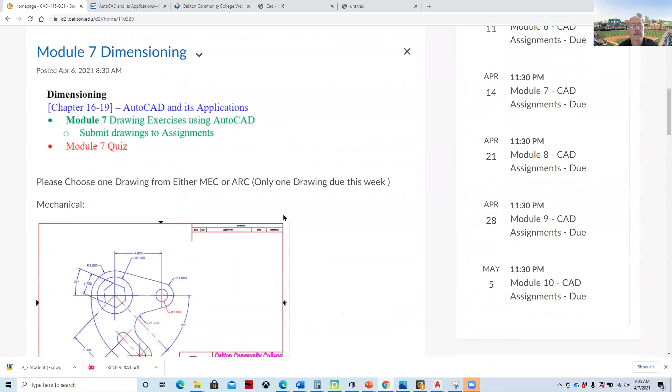We have Module 7 in the main splash page, but we're focusing on Module 6. We've had a few students who've been asking for more work, so we released Module 7 early, but it's not due yet. If you see it on the splash page, you're welcome to go ahead and work on it, and we'll cover that next week.

This week we're going to cover Module 6. Al, do you want to talk about it? Yes, we have the book open, ready to go. It's chapter 12 of our book.

Remember, you have online service for it, so when you click on it, it's going to ask you to log in. Joe is already logged in, so it automatically goes to where it's supposed to be. You can zoom into it a little bit more, or zoom out, depending on what you want to do. You can also print it and see what's going on.

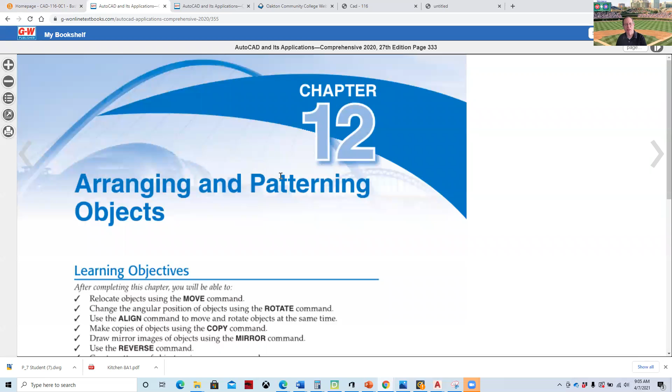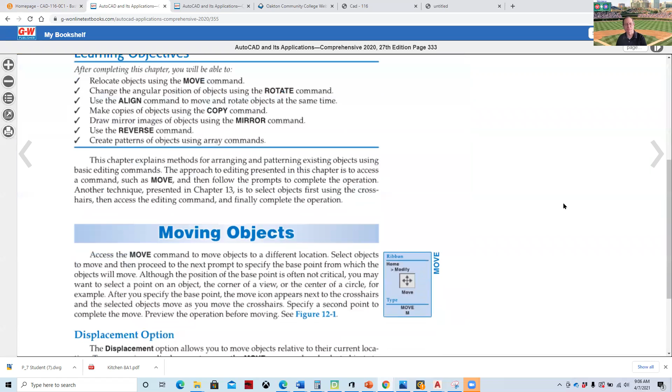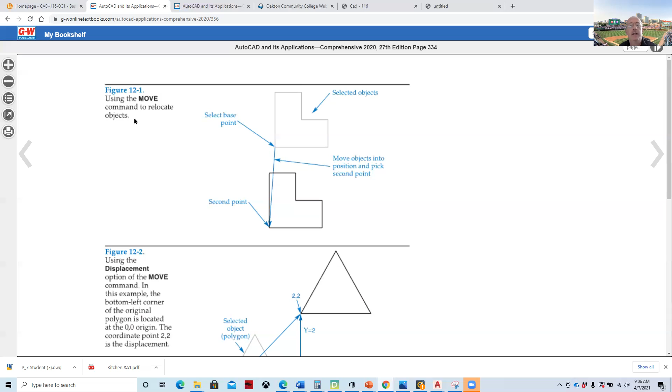As we start to look at where we're at in the textbook, we're at basic modify commands. We started off with draw commands, going through line, circle, arc. Now we're talking about modify commands. When we look at modify commands in AutoCAD, they're very straightforward.

Here's our assignment that we're going to work on. When we work on that assignment, if I wanted to move something like the kitchen sink here or the bathroom sink, what I would do is select Move.

Then you have to read your command prompt. Down here at the bottom it says select objects, or if you have dynamic input on, the words follow the cursor. This is really the way everybody does it now.

It says select object, so it starts off in select mode. We select, then we hit enter to end the selection. Then we say we want to move it from here to here. So it's a 3-step process: you select the objects, then you select the base point, then you select the destination point. Most of your modify commands are like that.

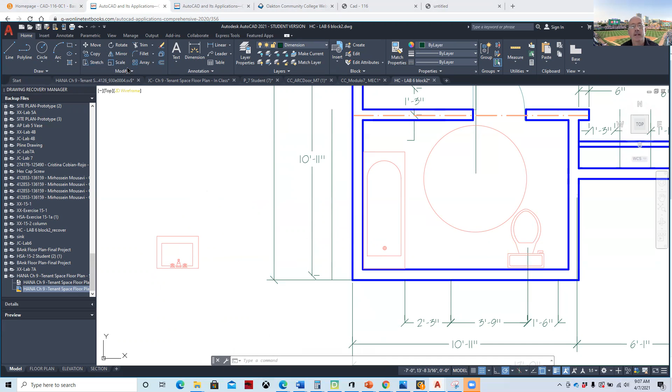So if we look at some of the other stuff here, moving different geometry using object snaps is preferred. CAD is so accurate that you could kind of make it look like you're moving it from the center, but what they're saying is use O-snaps.

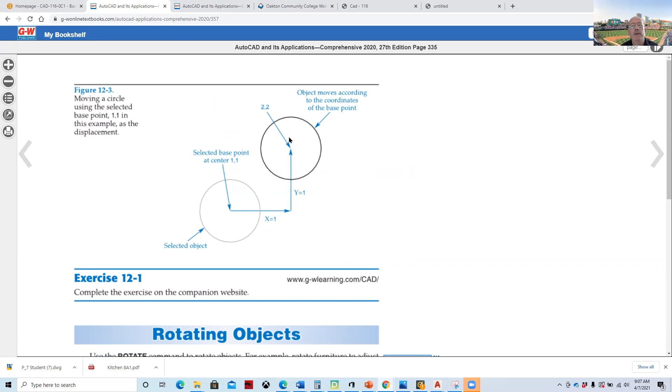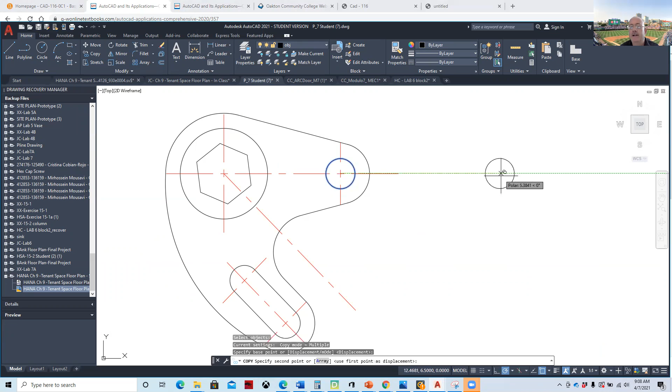When we look at something like this, it has some circular geometry, and I wanted to copy this circle. I'd hit enter, and then it asked me for the base point. If I have my object snaps active and set for center, that's preferred because I can glide over until it acquires the center point. That's a good area to use for displacement of the geometry.

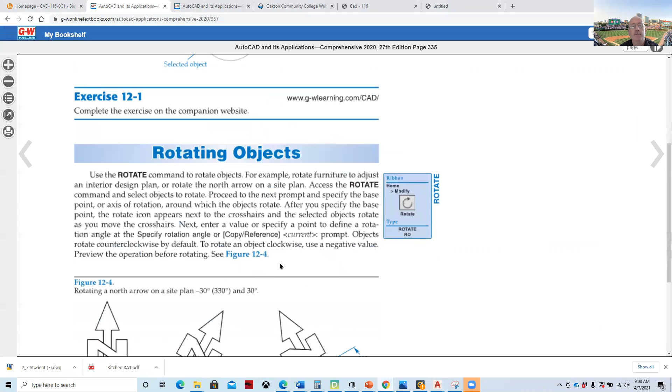More tips and tricks: Rotate, again a modify command where we select the object, give it a base point, and then you can either just move the mouse or type in the rotation angle. Again, a 3-step process.

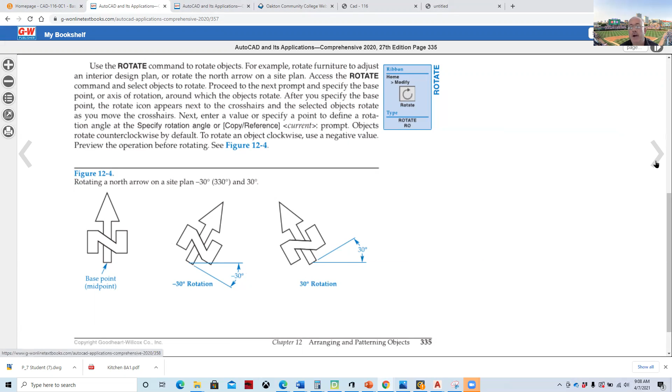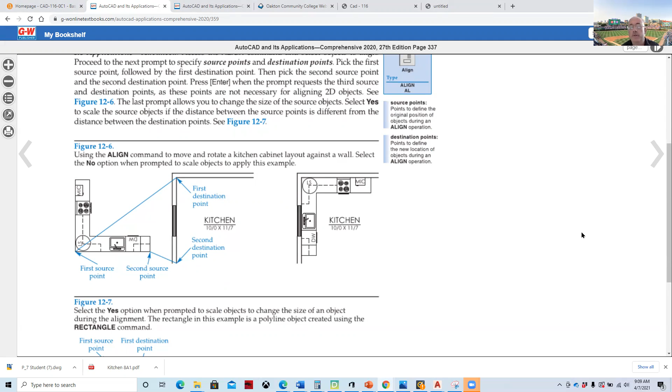More on rotates. You have to remember, AutoCAD started off as a very mechanical, precision kind of software, and it grew into more of a general design software. It does everything, which is what we like about it. You could be working at Trader Joe's making the signs, or for a manufacturing company or an art company. A lot of people use AutoCAD. So we're just going through basics.

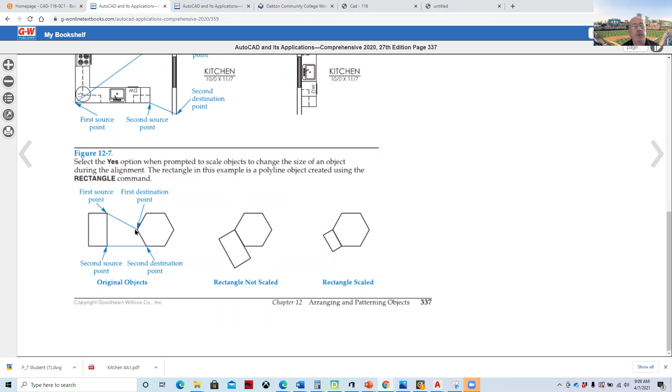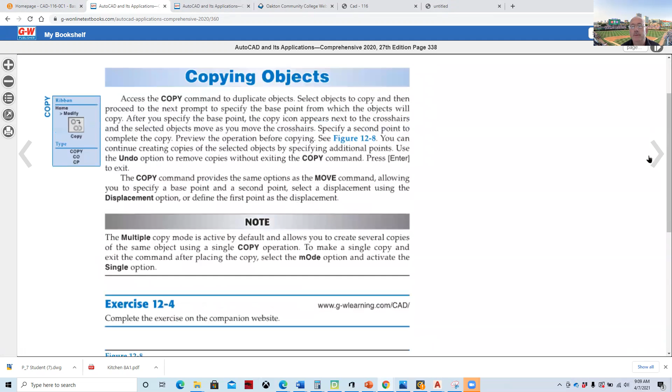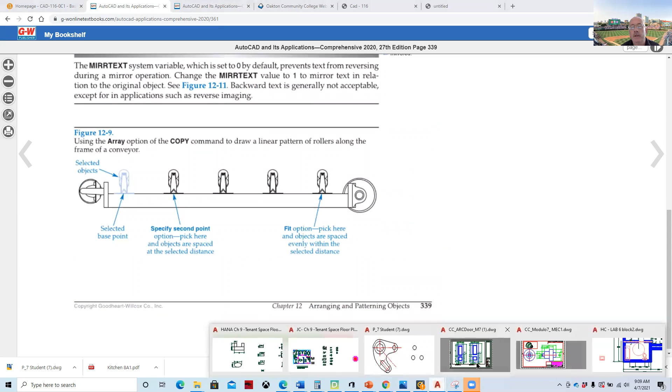As we look at these different commands, source point, destination point, this looks kind of like the Align command. I don't know if they're actually explaining it really well there, but that's what it looks like to me. Copying, we went through and showed that with the sink. Then you get into smarter functions like the Array command or the Mirror command. When we array or mirror different objects, what we're doing is automating things.

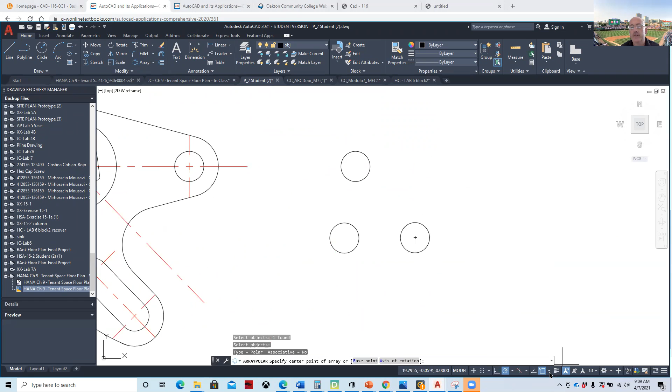So if I want to use a polar array, I can select the object to array, hit enter, and give it the base point. I'm not going to put it on the part because it would just go on top of it. I'm going to come out here and turn on tracking, though I can't quite get it to track out. Let me check if my tracking is on, this is a little nicer. So I can acquire and then go like that.

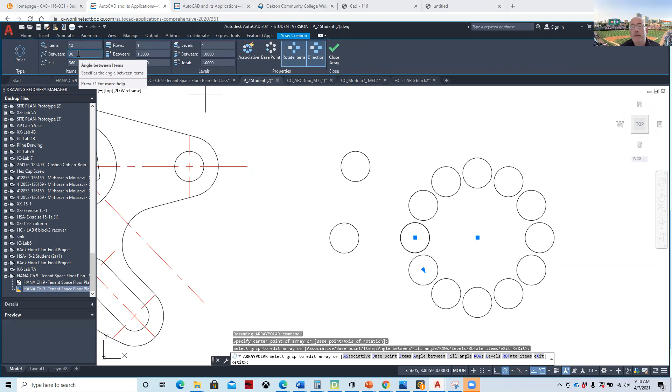Then you can adjust things with the number of items, and it'll divide it by 360. So if we say 360 divided by 12, it'll create a copy every 30 degrees. And that's why we use CAD, because it automates it.

Then I could do something like put a number on it. So if I come in here to make a clock, I'd use single line text because it's more accurate and good for making signs. I'd give it the start point, and to make it super accurate I'd say justify, then middle center, then set up the height—1/4 of an inch is okay—and the rotation angle, I'll say 12.

Then I'll rotate those again with the array command. I'll come back here to a polar array. But let's go before we do that—let's at least make it a different color so that it pops a little bit.

And we can scale that up a little bit. You know, you can scale text so it will be bigger. Let's just say 2 times bigger.

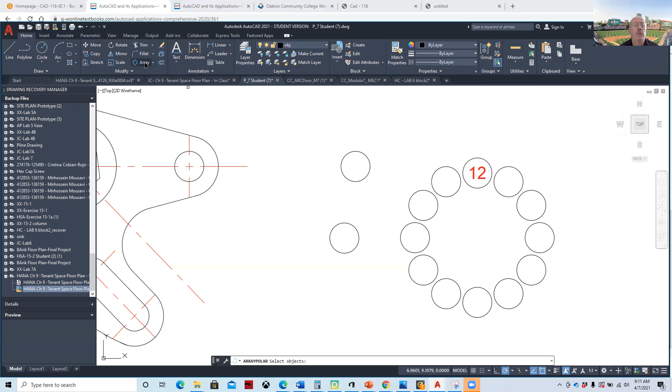Then we'll array that. So, array—we select it, we hit enter. We have to find the center point of the array, which I had to track, so I'm going to track it again. Bam. And I only have 6, so I have to change this to 12.

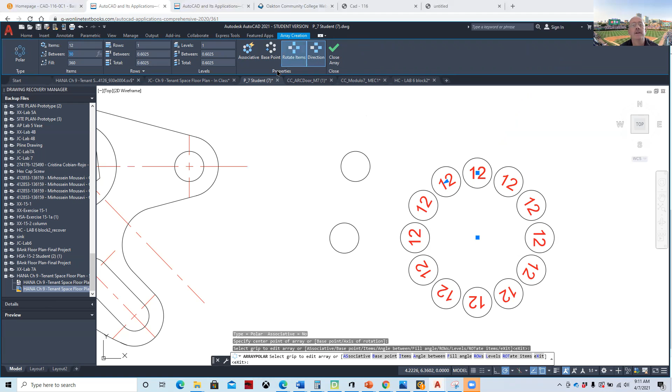Now it doesn't know how to go and fix all my numbers, but I don't want it to be associative, so I can close the array. Then I can just come in here and change the numbers: okay, 1 o'clock, 2 o'clock, 3 o'clock.

And Joseph, what would happen if we wanted to turn it around so they're all straight across like a regular clock? Oh, it would be total pandemonium.

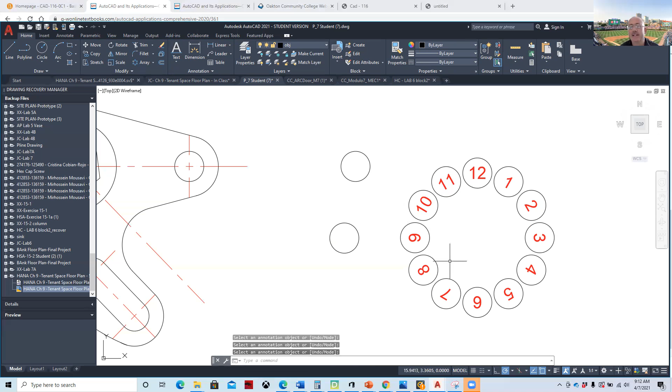But that's a great idea, isn't it? Because sometimes having the 9 sideways like that isn't really too cool. So what I could do is undo it, or just do it again—I'm just going to do it again. We could have clock version 1, and then clock version 2. That's the beauty of CAD, that's why we use it. If I have clock version 2, you have to remember what they call the beginning, the child—sometimes they call it the seed—is the number 12, because that was the first one I created. So as we work on these, I want to keep the 12 o'clock one.

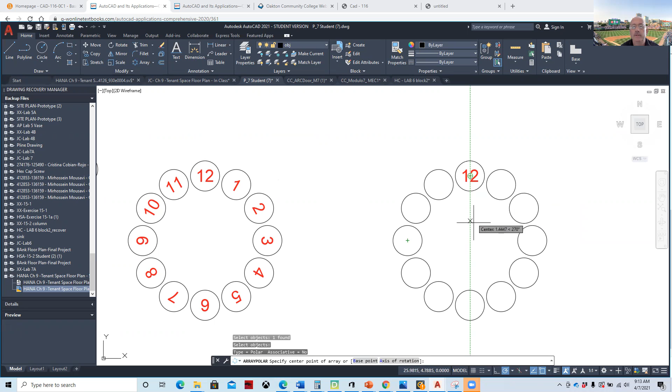Then when I array it this time with a polar array, I'll select my item, hit enter, acquire, track, acquire, and track. Bam. And here, talk me through it, Al—oh, what do I have to do to make this work?

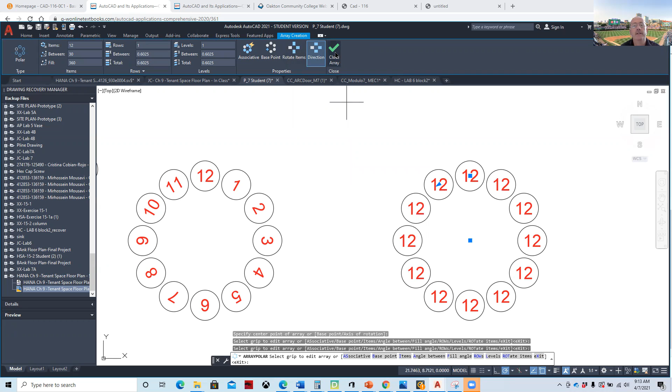He's going to say rotate items as they're copied needs to be unchecked. So we uncheck that, and there we go. We say okay to that, and then we go back through and do the manual task of putting the numbers in.

When you get down to it, don't think, hey, this is so boring—think, I'm getting paid at least $15 an hour to do this. And wouldn't you rather do design work than go move boxes or drive Uber? Maybe not all the time, but some of the time, I guarantee it. Having a nice thinking person's job requires thinking person's tools.

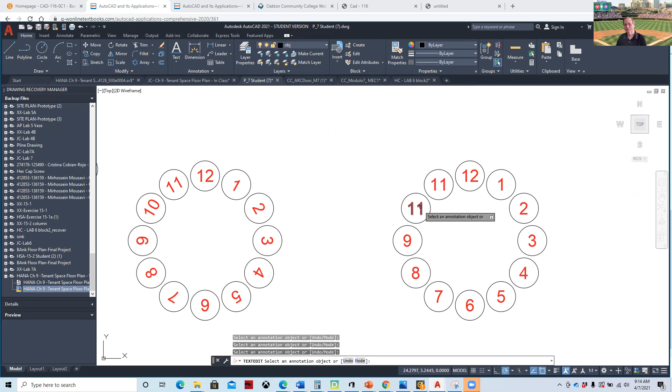I'm supposed to be right there. Like I say, thinking person tools. That's why we have Al on board.

All right, let's go back to our book reading. You have these different modify commands, and there are other little accoutrements, like mirroring text, which you can turn on and off.

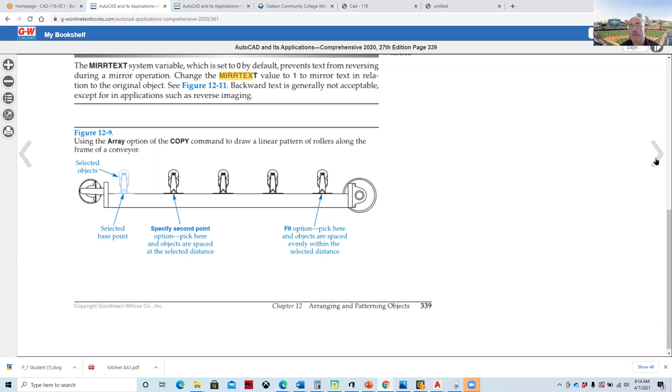Sometimes you want a mirrored image of text, like when you're driving your car and you look in the rearview mirror and there's an ambulance behind you - you can actually read it because the person who designed the sign decided to put it that way so you could read it in the rearview mirror. So being able to turn mirror text on and off is important.

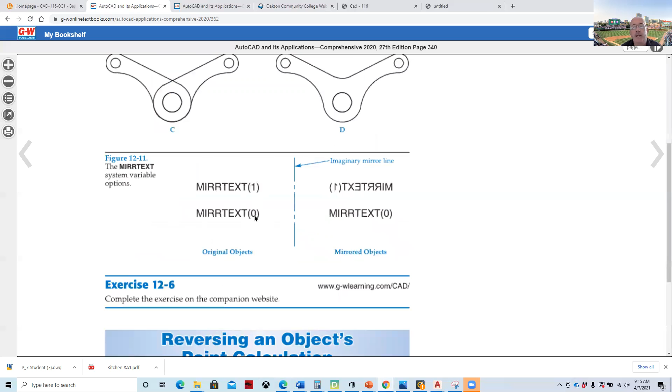You do that by typing in MIRRTEXT and setting the variable. When you see 1 or 0, it's binary - it means on or off. A 1 means on, a 0 means off, because AutoCAD is made by computer programmers.

You kind of find that out as you go more into it. Other things - we don't really use the reverse command, right Al? No, very little. We do the rectangular array.

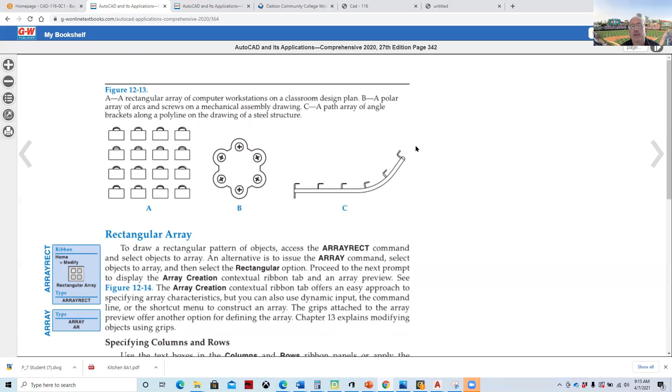Here's a nice multiple suitcases - I don't know why they didn't do desk chairs. And then they have these new ones where they'll go around a path, which is really kind of creative. You could make a path go up and around a room and put lights on it, kind of like Christmas lights.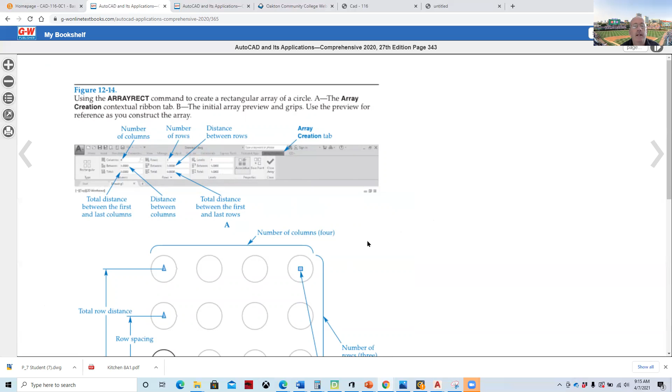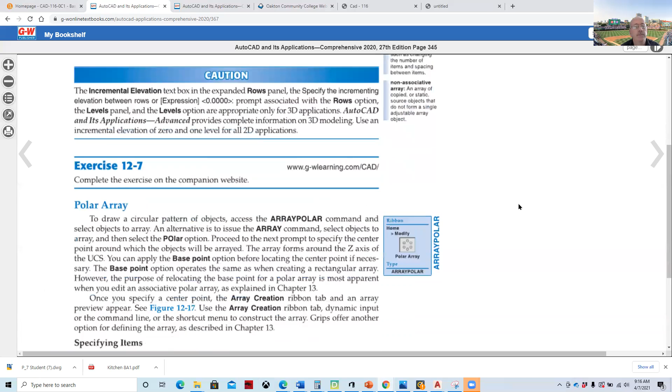But it automates these modify commands, and we've kind of gone through most of these here. So that's our array commands, polar array.

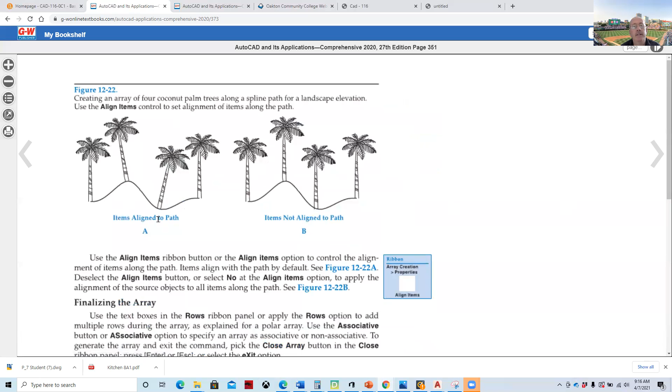They go through how to modify them, and most of the modifications are just done within the ribbon. So read your ribbon - you'll see things like align to path, like we did with the clock, where we rotated the items as they're copied. So they all have little options to them.

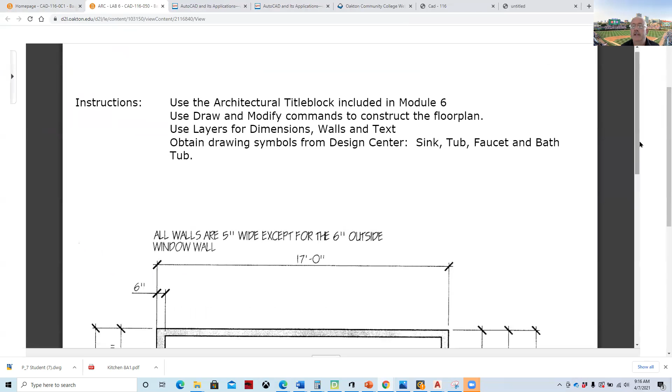Okay, so that's chapter 12. Module 6 then covers this drawing right here, and it is a drawing that you should use the architectural title block on. This is just, we'll call it a loft in - what are they, it's still called the John Hancock building, right?

Don't remember if they changed it or not. I think they changed it - I think they changed the Sears Tower to Willis Tower, but I think the John Hancock would be the same. So think of this as a loft in the John Hancock that costs $2,500 a month plus $500 a month for associations, and it's got this beautiful view of downtown.

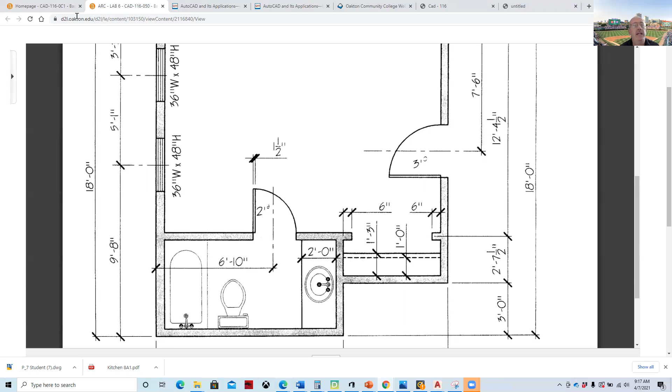You can get creative like that with CAD, but the essential is you need to have a floor plan of it, and so we have that as your assignment. Use the B-size architectural paper. The reason we use the templates and title blocks is because those have the layers set up for you.

I'm not sure, I'm glitching a little bit here. There it goes, all right.

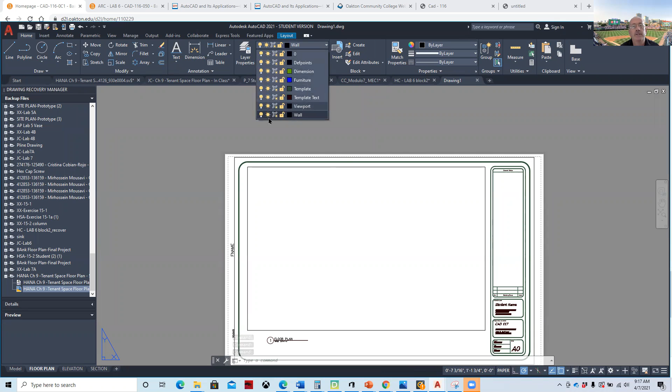So when you use the title block for architecture, you have the layers set for you, like walls and furniture, and you also have the units.

And so if we come up here, I show my menu bar. And then I go to - it didn't show my menu bar. No, you hit the wrong button. So yeah, that's what happens. Anyway, we'll go to that later.

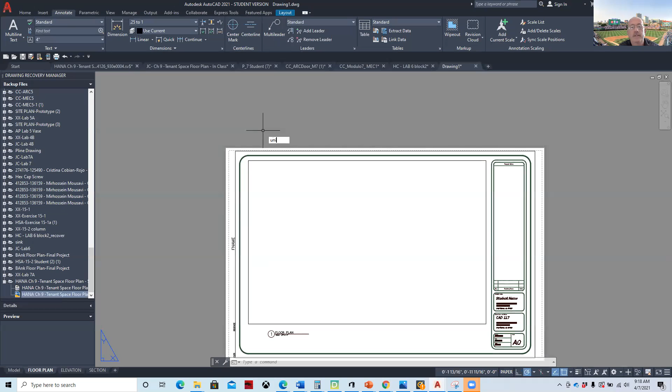But if I type in units, you'll notice that it's architectural units, which means feet and inches. And so you'll open that title block and then you'll draw in model space, and when you draw a line in model space, it's going to be in feet and inches.

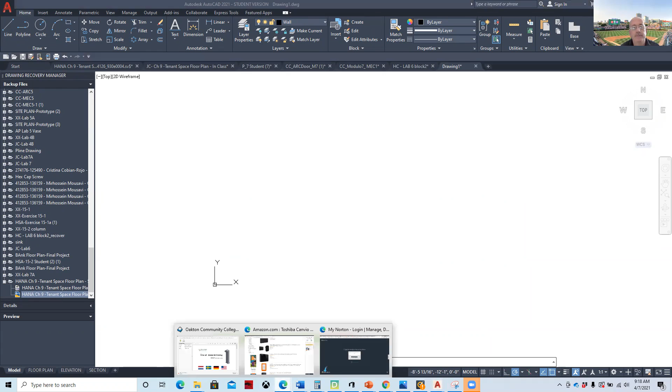And so if I come back here and look at the assignment, somewhere - maybe it's right here - and we'll download that. So if I want a 17-foot line by 18 feet, we can just start off with a box.

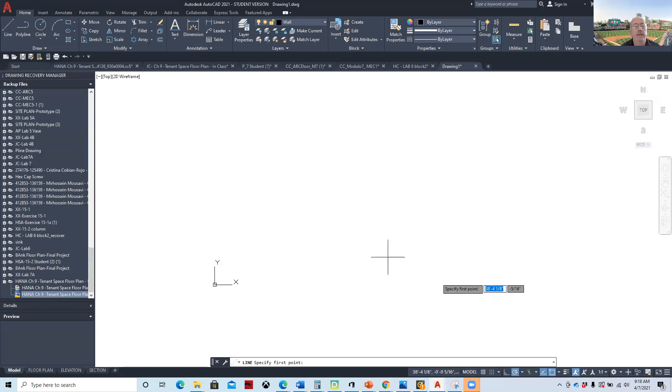What I would do is come back here to my title block. I like to use grid and snap - turn on the grid, turn on the snap. And then I'm not sure how I get my menu bar back, my pull-down menu. Here it is, it kind of moved. This is the biggest problem with AutoCAD - finding where they put the commands.

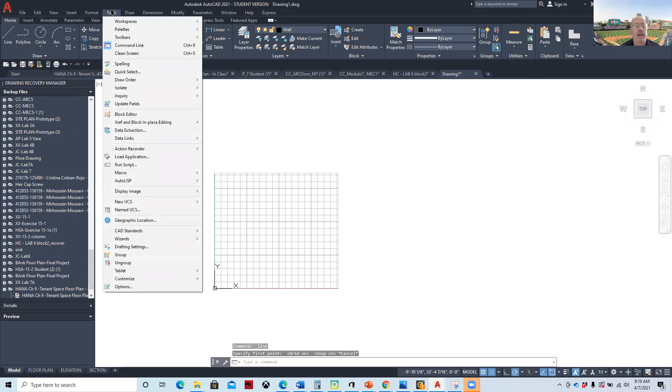So if I go into my drafting settings, a good snap is 6 inches and a good grid is 12 inches.

We can have the snap and the grid on if we want. Polar tracking should be on. Object snap should be enabled, and object snap tracking should be on.

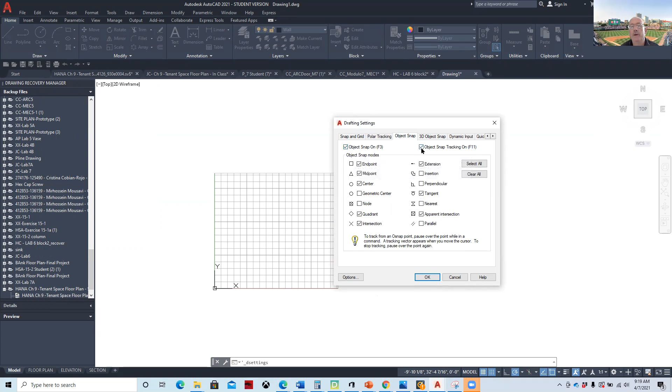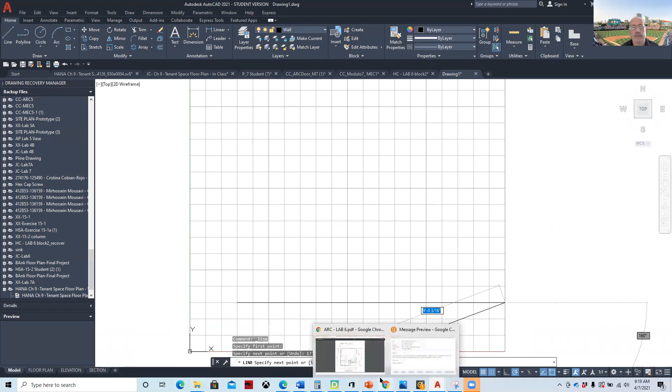So when I draw a 17-foot line and come over here and get to one of the squares, track it out, type 17 foot, enter. And then I can track that up. I think it was 18 feet. Let's see where that was. 18 feet. And so we can come back here, track that up.

If I have the line weights on, it's easier to read. So we'll say 18 feet. Zoom that down, come back this way, 17 feet, and then C for close.

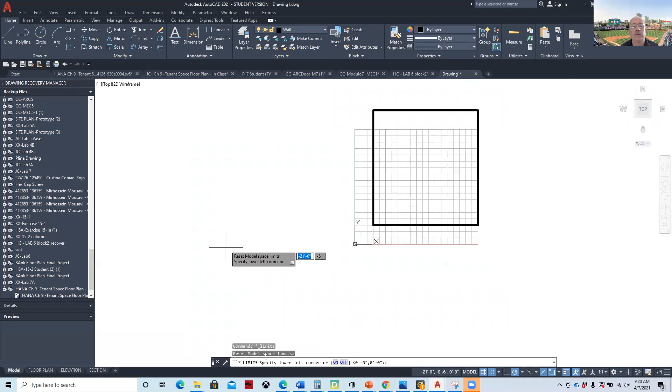If it bothers you that the grid pattern isn't big enough, then you have to adjust the limits. So if I go to drawing limits and say lower left-hand corner, 0, 0. Upper right-hand corner, let's say 30 feet, comma, 30 feet, enter. See, now we get more grid space. And that's how it works.

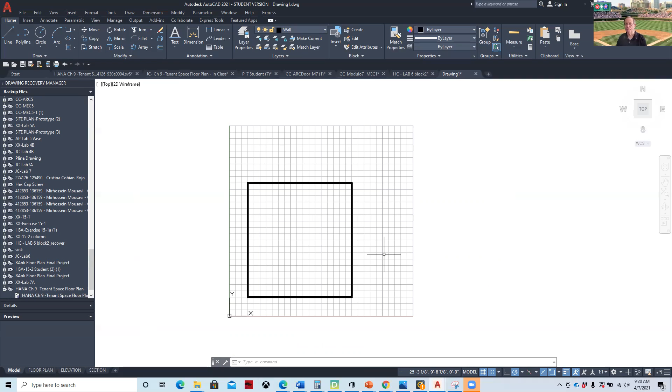Now, when we worked with the pencil, what would we have to do for that, Al? T-square, nice little things, a sharpened pencil, mechanical ruler, architectural ruler, depending on which one you want to use. And we'd have to have paper too. Oh yes, multiple, so you can adjust the size of the paper. You can do all these different things with the CAD system. And so that's the basics, okay?

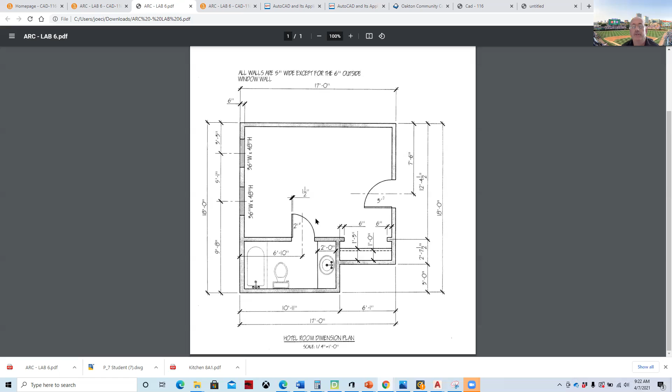Can you get around this room? Can you get into the closet? Can you hang up your coat? All these little things are why this field is a good field for people to study. So as we go into these assignments, they have scalability. They may look fairly simple, but that's kind of where we're at with it.

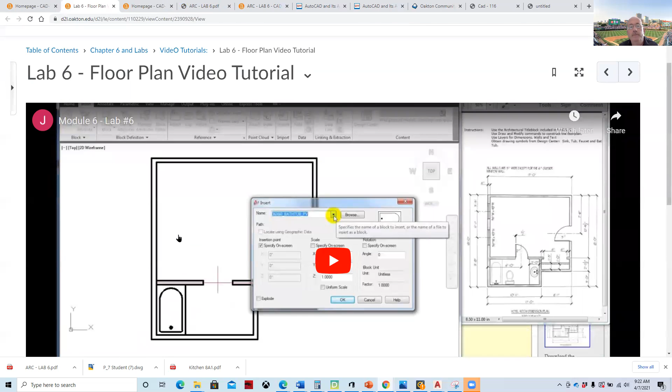And then if we come back here, Al's got everything laid out. Here's our videos, and if you look at the old video, some of the old ones are really good. Come on, you can see the images, close caption it. Okay, and so I walk you through. It really comes down to how much time me and Al Rosen have to do the videos. Right now we're going as fast as we can, but we don't want to go too quickly.

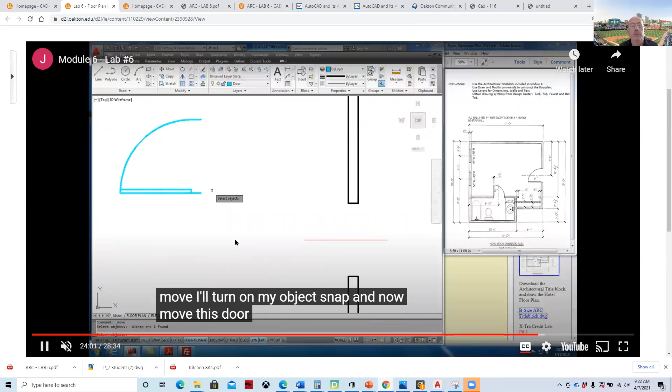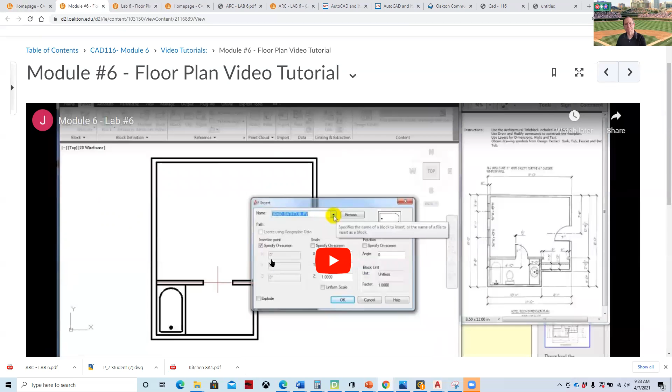And so we show things like how to insert a door from a palette, and this is a block, and you can adjust the size of them and things like that. But the videos are really good, and Al is the man as far as being able to organize these. And so here's a newer video, same thing, Joe. Oh well, maybe nobody would notice. But those things happen, you know, we can always update that.

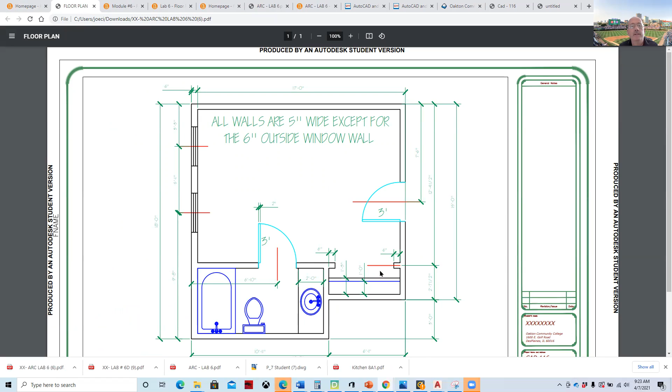And so that's the assignment. Here's the PDF, and this will just be... went somewhere, there it is. And so here's an example, same thing done on CAD. That's what the B-size architectural paper is set up for.

So with things the way they are, module 6 is due next week, and then module 7 we pushed back a little bit. So as you look at it, actually module 6 is due the 11th. If you need more time, just request it, no problem. And all the content is there for you.

And that's our quick review of this week's Zoom assignment.